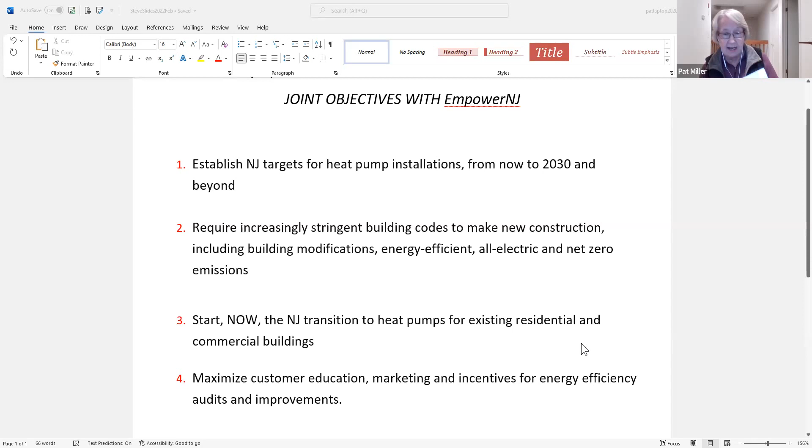Thank you, Pat. So today we have two distinguished speakers. First, we're featuring Hap Haven with the New Jersey Clean Energy Program. Hap has been on our previous webinars and he covers the most bases and is always one of our most informative speakers. So Hap will spend about 30 minutes discussing paths to a zero carbon home and will show us the steps residents can take to achieve net zero. Hap, the meeting is now yours.

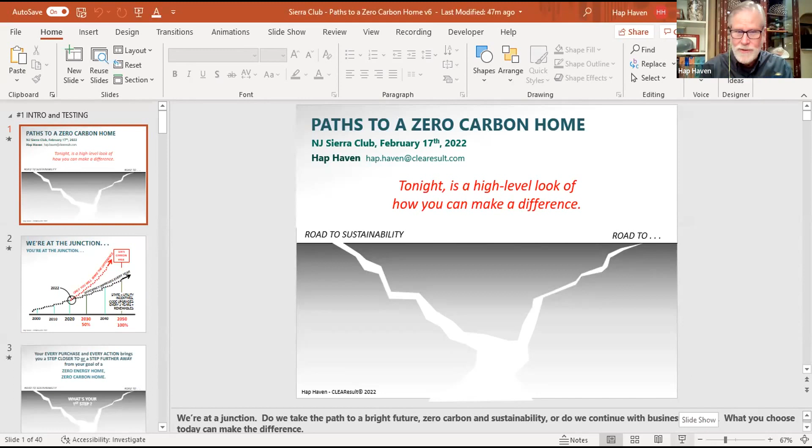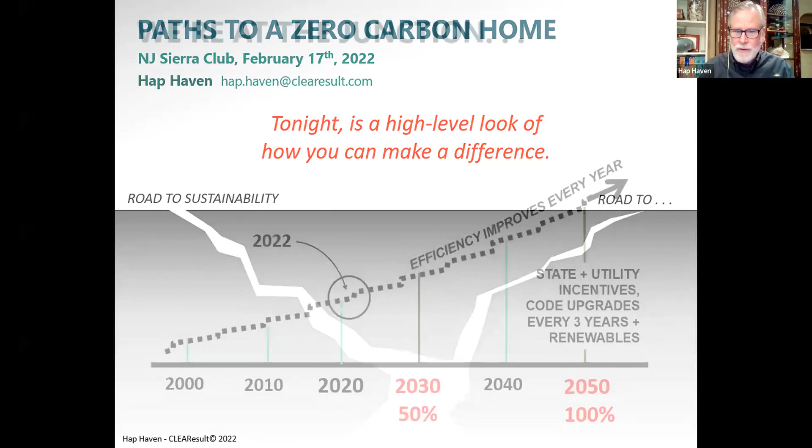All right, so first of all, I just have to say I'm really excited about this presentation because it's the first time that I've put together all the paths to zero energy, zero carbon. And tonight, I just want to say this is a high level presentation. I say that because every slide that I'm going to show you tonight could in fact be a presentation all by itself. You could drill down into the details and spend an hour on every one slide, but it's a presentation about you and how you can make a difference,

because a lot of people think that, well, you know what? We're going to get there. We're going to get to this magical goal in 2050, because every year codes get better. There's incentives on the state side, on the utility side, and even tax credits on the federal side. So people are in this malaise about, yeah, it's going to happen. The problem with that is the goal is way up here. And if we just track where we are right now, we're going to fall grossly short of that.

And so what I say is we're at a junction right now, because only you, meaning all the people on this call and all your friends and people that you know, are going to be able to get us to that goal. And it can't be like, oh, someone else is going to do it. We all have to take personal responsibility and get going on it. So let's start talking about it here.

Just give me a second here. All right. Sorry, I just have a big bar across my presentation. It's hard to see it.

So let me just say that every step you take, every action you take, either brings you closer to what we want, which is that sustainable society, that zero carbon home, the zero energy home, or takes us away from that. So we're at a crossroads, right? We can take one road and go to sustainability, or we can go down business as usual, and it's not going to get us where we want to go. So I ask you, what's your first step? And this is why I'm excited, because in 3 slides, I can tell you what your steps are.

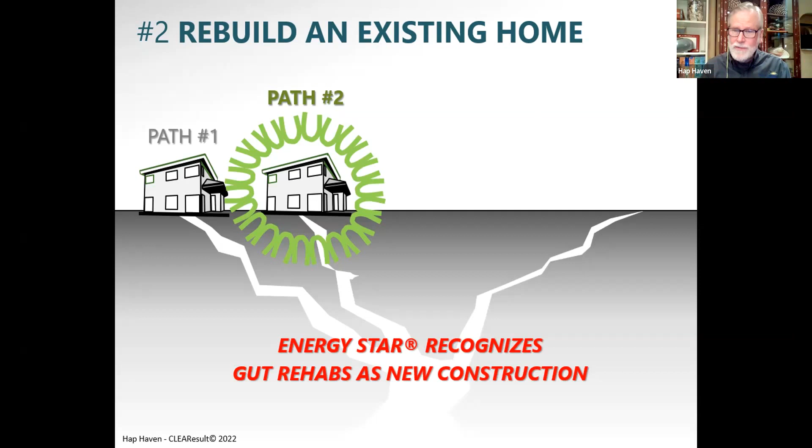So I can buy a brand new house, I can do a gut rehab of an existing house, or I can take the third path, which is the one that most of us are going to take, which is upgrading the home that you're in, and the upgrading starts with the shell itself. The reason it starts with the shell and not the mechanicals is because the mechanicals, meaning your heater and air conditioning, are sized to the heat load of the house, heat gain, heat loss. If you were to put in a brand new system sized for your house now, and then air seal and insulate it, you're going to be way oversized on the heating and cooling plant.

So start with the shell, then the mechanical systems. And of course, appliances can happen anytime. So we've got these three paths: new home, rehab, or upgrade. The beauty of it is the components and the efficiencies are similar no matter what path you choose.

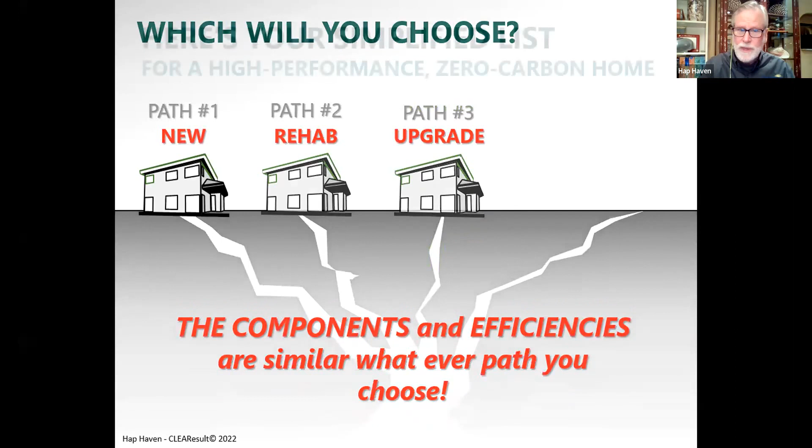All right. So let's talk about it. The first one is, if it's a new house, you should be buying an Energy Star house, zero energy ready, or net zero home. And if you do that, the process to make that house the way it is has integrated design and certification. And we're going to talk about that.

If you're in your existing home, it's going to be an energy audit. Okay, that's the first step that you're going to take, no matter what path you're on. Obviously you're just paying for it if you buy the new house, and you're going to be owning it and working with it if it's in an existing home.

The second step is to embed the solutions directly into the shell of the house. So we're going to bake into the house the things that make houses efficient, and we're going to talk about each one of these as we go along. The third one is to install all the solutions into the shell, meaning the heating, the cooling, everything else, the appliances, as most energy efficient as possible. So 3 things to look at, and let's get right to it.

If we're going to do the certification and or audit, both of those, focus in on and embrace building science. Building science first started coming along strong in the late 70s, early 80s with the Weatherization Assistance Program. And we started codifying and putting the scientific method to, oh, how tight is this? Is that working right? It's come along.

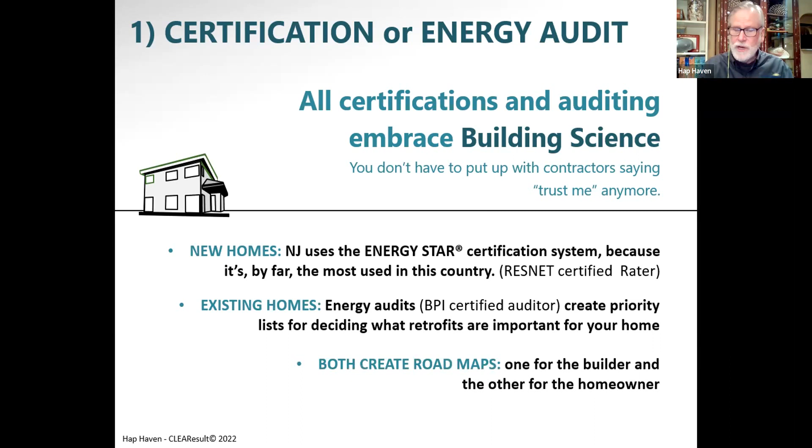So where do we sit for Energy Star homes? A score somewhere around 55 to 65. Zero Energy Ready is somewhere between 45 and 55. And of course, the Holy Grail, what we're looking for, are net zero homes that have a HERS score of 0. And it doesn't mean they're not using any energy. It means that, net, over the course of a year, I use this amount and I generate that amount.

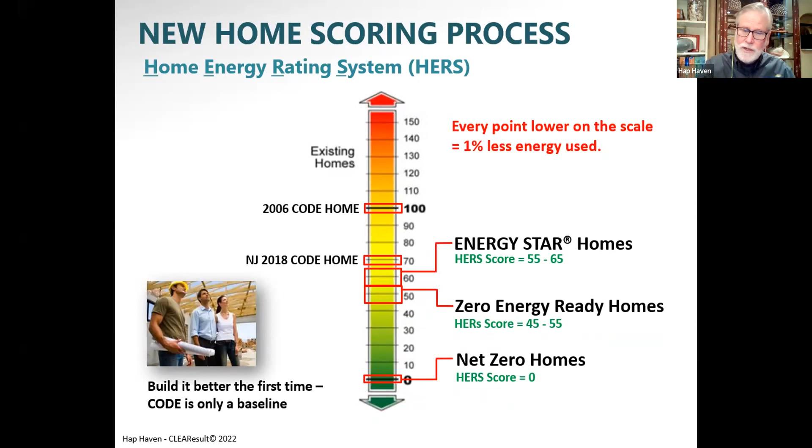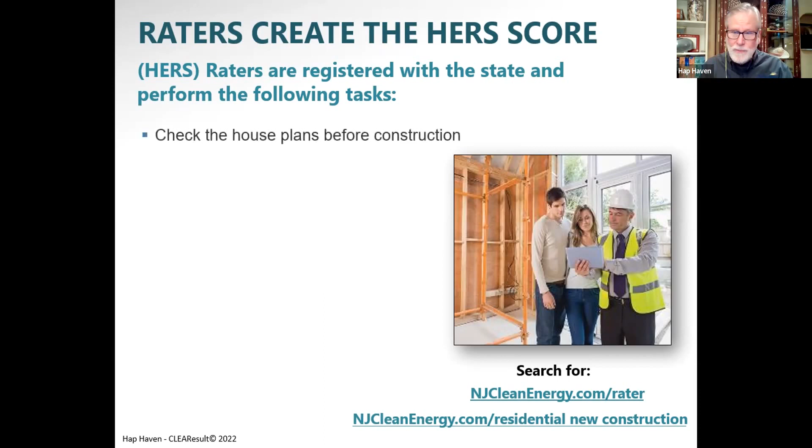So it's the same amount. The raters work for the builder, not for the homeowner, and they help the builder understand how to maximize their construction. They do a pre-drywall check, like the photograph here, looking at the house before it's closed in from the inside and outside, so they look at the shell and the framing.

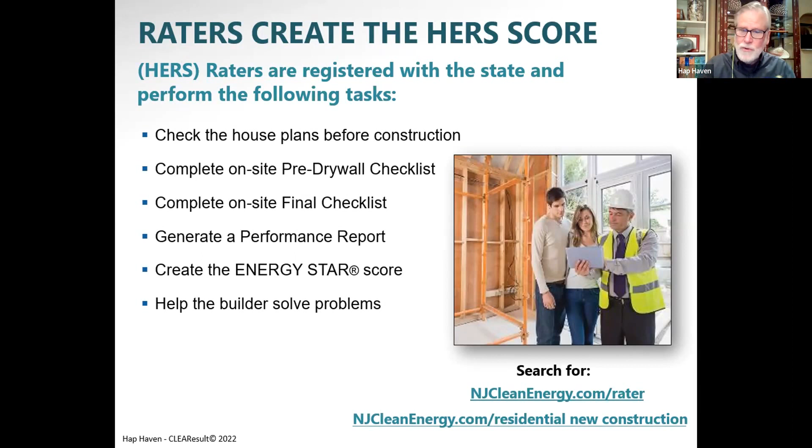Then they do a post inspection and generate the score. Moving from new construction to existing homes, the Building Performance Institute auditor is going to use Home Performance with Energy Star protocols. By doing that, they can tell you exactly what steps to take to re-engineer the home to be more comfortable, energy efficient, safer, healthier, and more durable. These are the things we're looking to do.

Now we're doing that in the new home or the gut rehab too, it's just not involving you in the same way.

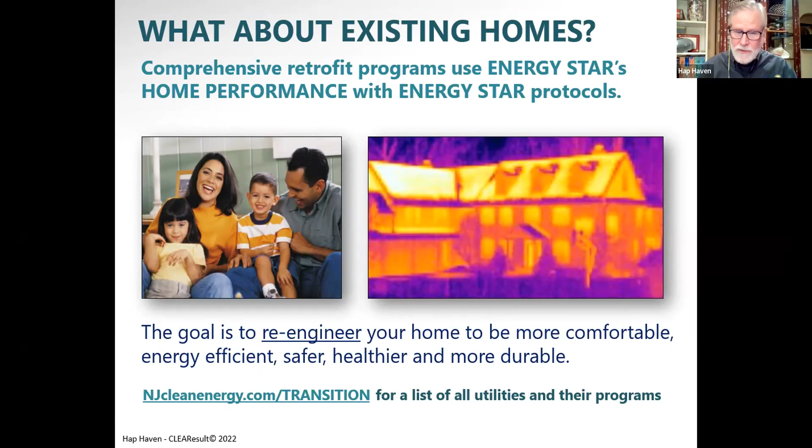Now, as an energy auditor, if you've been around a couple of years and done a couple hundred homes, you can walk into any house with a clipboard and basically inventory it without tools. But you're always going to be using the tools. I'll guarantee that if you're good, you'll get it 90-95% right, but you use the tools to guarantee that what you thought you saw was in fact accurate.

A good example is the blower door. It's the workhorse of energy auditing - it can depressurize or pressurize the house, whichever you need, and find out exactly how leaky the house is and where the leaks are. There are lots of other tools, but every energy auditor should be using a blower door, an infrared camera, a combustion analyzer, and a moisture meter, because these answer the most important questions inside the house.

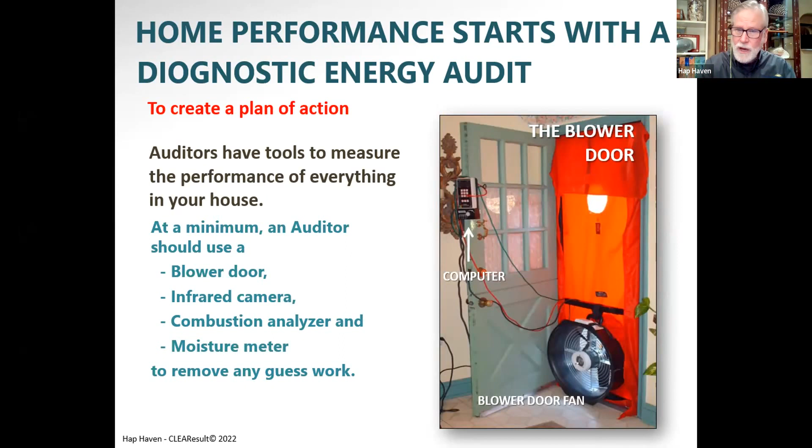Now, this is like a week-long course just to talk about the tools, but let me give you a quick picture of a great tool, an infrared camera, used with another great tool, a moisture meter. I'm looking at this picture of a basement - a digital picture. What I want to know is where is it wet and where isn't it. I know it's wet in the back here where I'm putting my cursor. You can see the parging, the mortar, beginning to fall off there - that's wet. Well, where else is it wet?

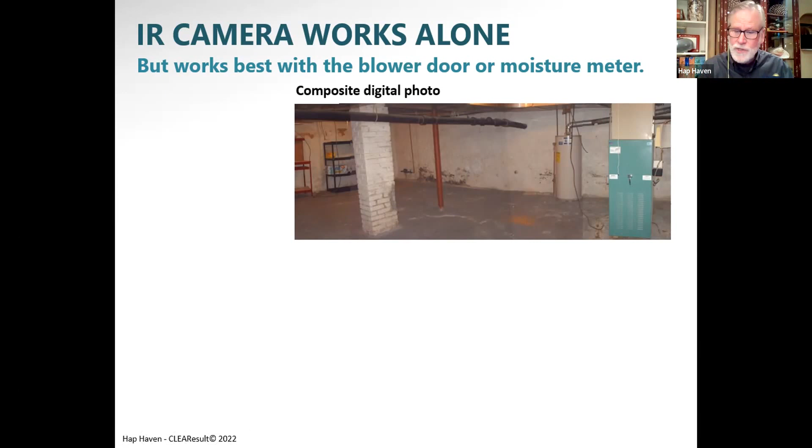Use the infrared camera in combination with a moisture meter, and this is what you see: blue is wet, darker blue is wetter. This tells me one thing about the basement that's really critical in this house - the water problem is coming from the bottom up on the front of the house. It's a subsurface water problem. I'm not going to be able to deal with it unless I dig up the entire front yard.

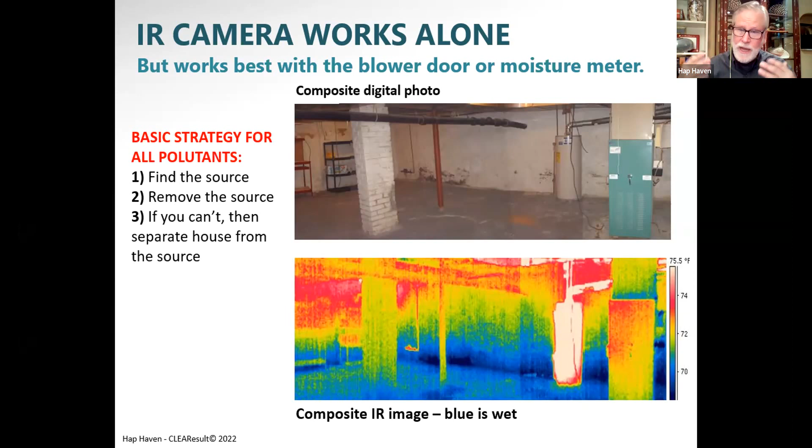So what we say in the business is every pollutant basically has three things - if it's radon, water, lead, whatever it is - I want to find the source, I want to remove the source, and if I can't remove it, I want to separate myself from it. In this particular case, we can do that, but it's going to be an interior treatment as opposed to an exterior treatment. All right, so that was the energy auditing side of it and the certification side of it.

The second thing is doing something where we're baking it right into the building, and those are called control layers. You might ask, what on earth am I trying to control? Well, it's really simple. I'm trying to control heat, air, moisture, and the sun. These are the four things I'm trying to control, and my shell should do it for me.

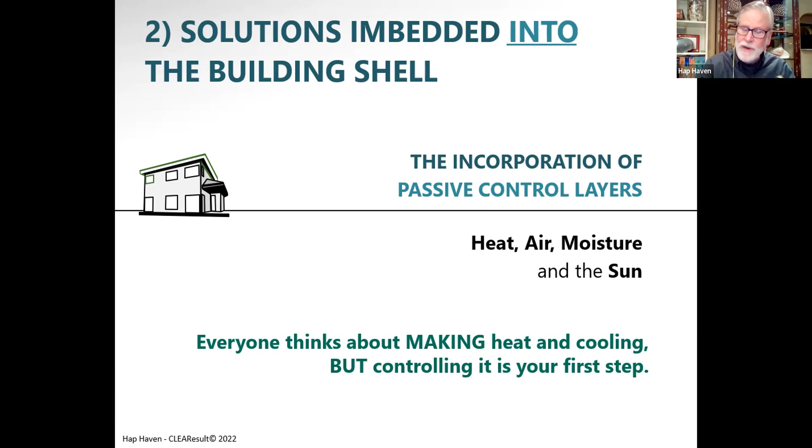Now, everyone thinks about making heat and making cooling for the house, but that's the second step. The first step is to control the envelope. Then you can think about the second. Here's heat gain in the summer, heat loss in the wintertime. This is what we're thinking about, and it's different depending upon the house.

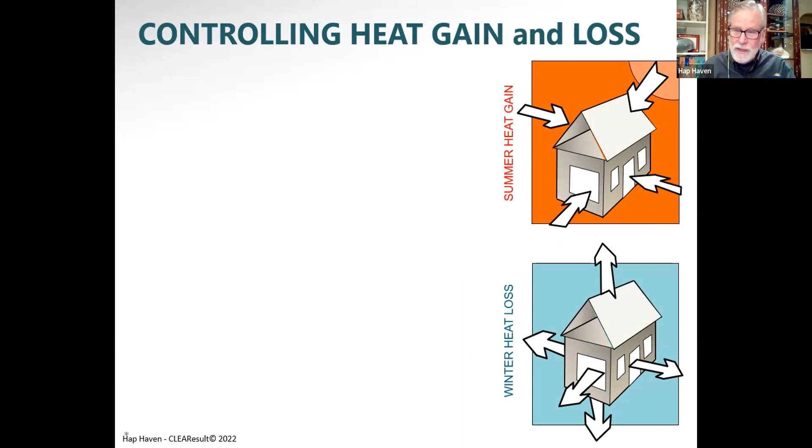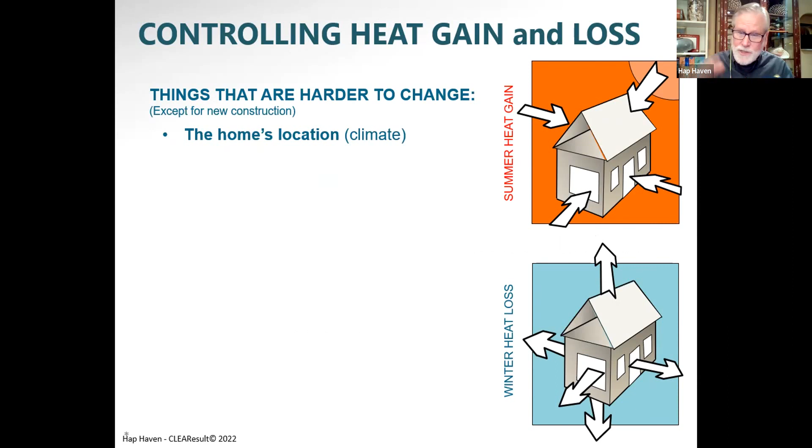So if I have a brand new house, there are things I can change. If I'm building a house from scratch, I can change its location. Is it built in Cape May, or is it built in Sparta? Big difference in terms of climate. Also, when building a house, I can face it the right direction if I want to get the sun to heat the house in wintertime and turn my back on the sun in summertime.

I can also control how I create it—is it a framed house, an insulated concrete form house? What kind of structure is it? I can control all these things, and I also control how big it is. So these are all things, in new construction, I can control.

But there are some things I can still control even after I build the house. I can control how leaky it is—I can air seal it, and I can also insulate it better. Some insulation, like wall insulation, is a lot harder than basement or attic insulation, but I can still do it. And how the windows are shaded—these are all key things.

It's kind of funny—I remember doing an energy audit maybe 15, 20 years ago on a new development. Great, beautiful house, had a great room with two-story windows, and those two-story windows were facing west. So every day about 4 o'clock, the room overheats. That's why we love to use mini splits in the industry, because I can air condition just that room, and I can do it very effectively. But if the builder had thought about that to begin with, he could have baked in some shading on those windows even before we got going.

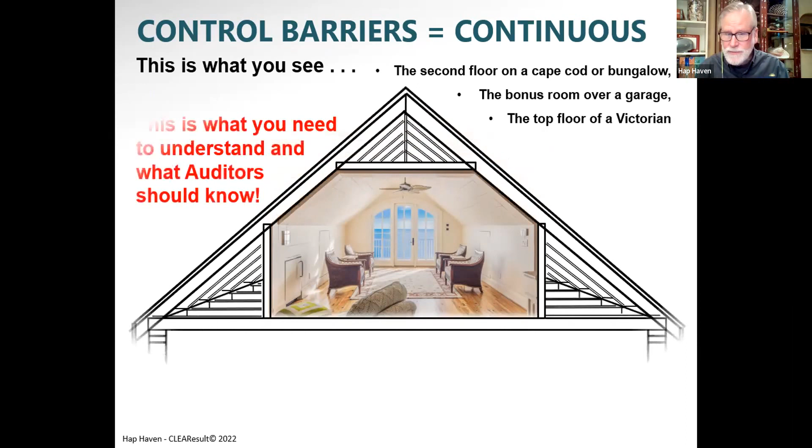Now, remember, we're an energy auditor, and this is a nice room in a house. It could be a second floor on a bungalow, or a bonus room over a garage, but you'll see that it's under the slope of the roof. You look at it like this—the energy auditor has to look at it like this. The energy auditor has to understand the framing of every house, because without that, you won't know how to insulate it or air seal it.

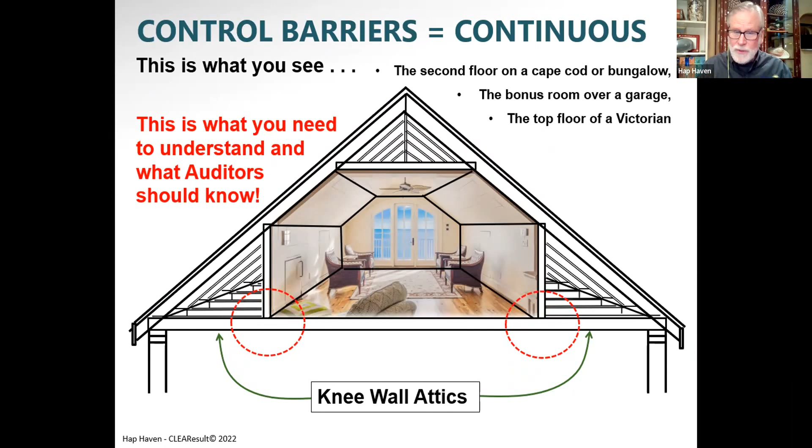You look at this and say, okay, we have two attics behind those walls. And I have a problem right there where I've circled the two joints, the connections between the flooring and the walls. Here's that on the left-hand side—you can see a close-up of that knee wall and how the air travels through it. When we talk about the control layers being continuous, this is what we're talking about. It's not continuous—there's a break in the air barrier here and the insulation barrier.

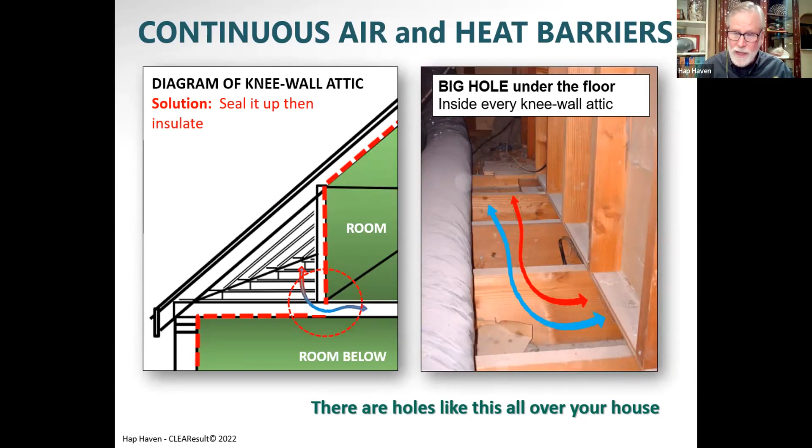So the air from the cold knee wall in the wintertime goes underneath the floor, making the ceiling of the first floor cold, and making the floor of this little upstairs room cold as well. I need to be able to control it—there are holes like this everywhere in the house.

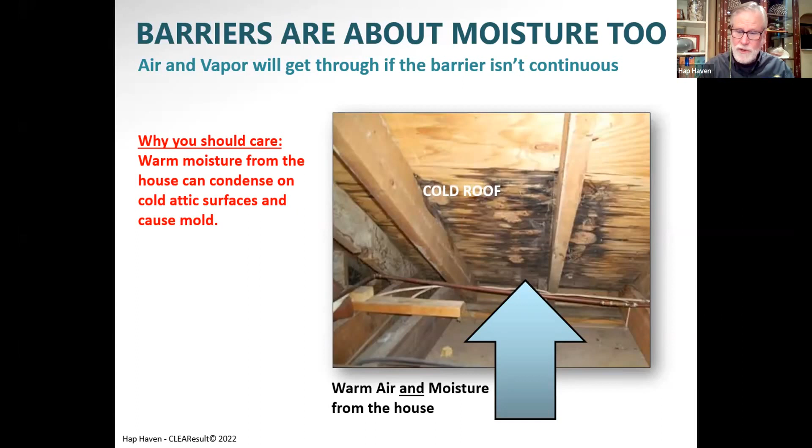The other reason we need to do this is because moisture goes wherever the air goes. Moisture is lighter than air, so it goes up, but wherever the air goes, it takes it with it. If I have holes in the attic floor, the moisture from the house will end up in the attic—no ifs, ands, or buts about it. If there's enough moisture, or if the attic is cold enough, we'll get condensation and mold. It's as simple as that. That's another reason why we have to control—remember, I said air, heat, and moisture. These are the three things we need to control, and sun, we need to control as well.

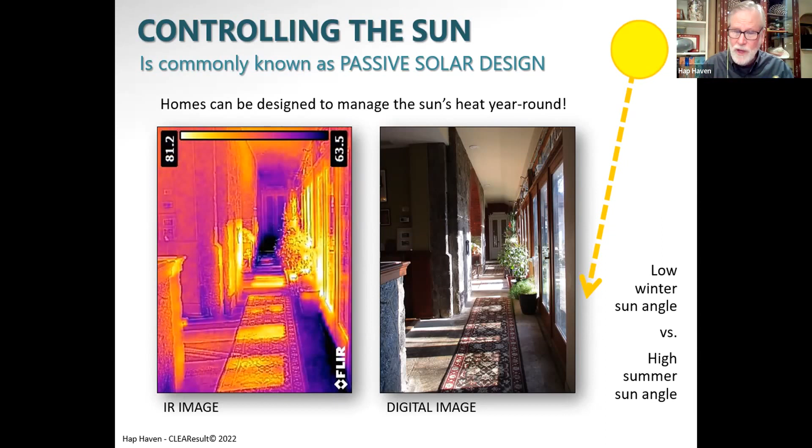All right, here's the last section, and in a lot of ways the most important, because we're talking about electrification. Mechanicals—this is what we put onto the house. We're not building it into the house, we're putting it onto the house.

Heat pumps that replace air conditioners, and heat pump water heaters. We also have high efficiency appliances: LED lighting, induction cooktops, heat pump dryers. I'd submit that very shortly your car or truck will be considered a high efficiency appliance for your house, because you're going to be charging it from the house. And in case of a power outage, the car or truck will be able to power your house—a symbiotic relationship.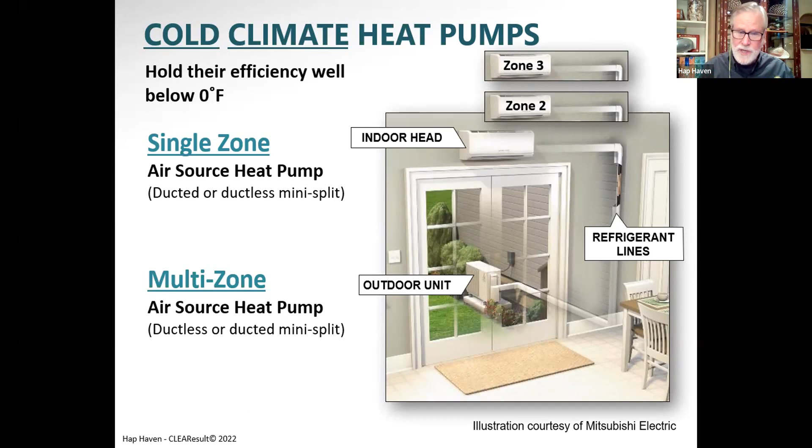Let's talk about how the heat's distributed. I just showed you the typical wall mount—most people are familiar with seeing that mounted. They're rather large, but they're going to get smaller and smaller. But that's not it—you can bury something in the ceiling and do a ducted version, and put cassettes in the ceiling that go 4 different directions or 1 direction.

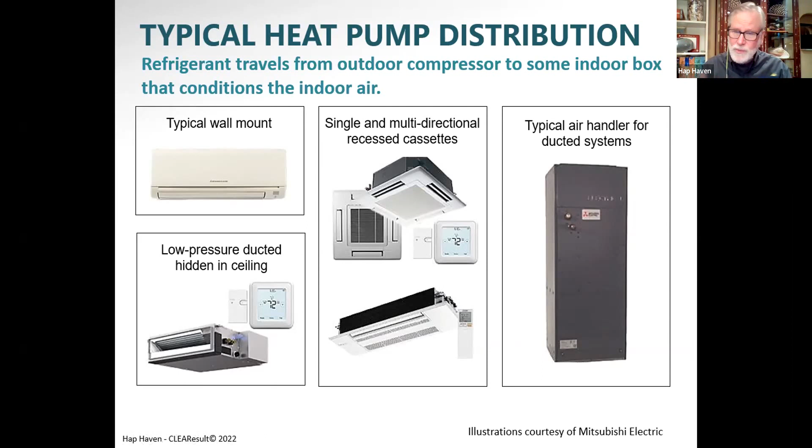It's very flexible—or you can hook it up to an air handler, which would replace your existing air handler in the basement if you have a ducted system. So heat pumps are very flexible in terms of how to heat and cool your house.

But that's where I have to stop and remember what we're talking about here: refrigerants. What we're doing is using a refrigerant, like in your refrigerator, freezer, or air conditioner, to move heat from one place to another. That's why it's called a heat pump—we're pumping from one place to another.

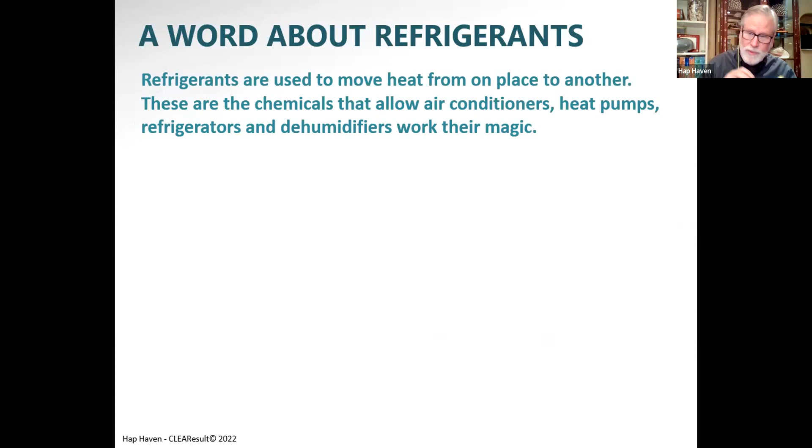But it's something we need to keep in mind. When we talk about global climate change, the warming of the atmosphere and all that, we're talking a lot about CO2, carbon dioxide. The entire global warming potential scale is based upon CO2—it has a GWP of 1.

Natural gas, which is what we're trying to replace, or methane, has a global warming potential of 28 to 36. Refrigerants, their global warming potential is in the thousands. So we don't want to be leaking refrigerant out into the atmosphere because it has terrible consequences, okay?

The EPA and most countries are working toward establishing the law that refrigerants moving forward have a global warming potential of 750 or lower. There's a whole bunch of them out there on the market, but most aren't used for various reasons. At the very bottom of the page here, R32 is probably the most commonly used, not much in this country, but all over the rest of the world, because it has a GWP of 677. So that's taking us where we want to go.

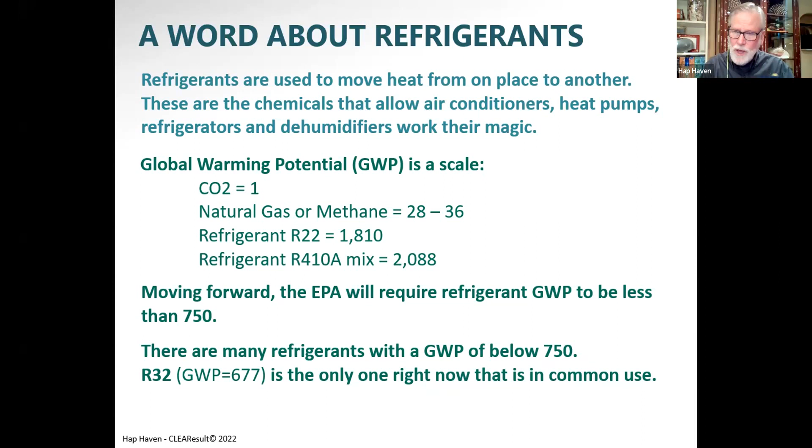But there's another step we need to take in the marketplace, and that's this slide. Instead of doing a traditional heat pump where we have a compressor outside and some sort of distribution inside with refrigerant lines that can potentially leak down the road, you have a single unit. It's called a monoblock, and it's a single unit outside that has the compressor and the evaporator, with only an extremely small amount of refrigerant, because it's only going from here to there and back again. It's not being carried into the house, and it's factory sealed, so it can't be screwed up in the field. I'm going to submit to you that as we move forward, you should be looking for this, okay?

They have, on the left, low temperature solutions, high temperature solutions, and hybrid solutions, so they've got something for everyone. The problem is that we don't have a lot of these in the marketplace here in this country, and I've been saying this all along: our country is so far behind the curve compared to the rest of the world that we have to hurry up and get with it.

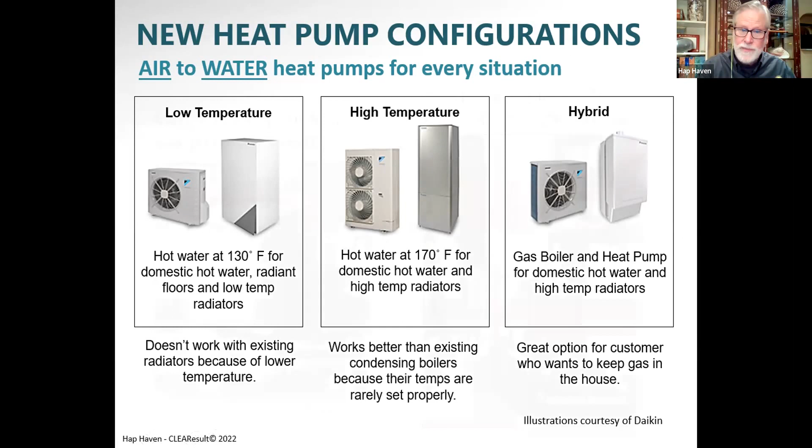All right, I'm coming down the home stretch here. Let me just look at a retrofit. Here's a customer that has a 96% gas furnace. They want gas in the house, you're not going to take the gas line out of this house. Well, that's fine, no problem. You replace the air conditioner and you put in a heat pump.

Now what I can do is air condition like normal, but I can also heat on the shoulder months, into the fall and into the spring. The changeover time from when I'm using the heat pump to when I'm using the high efficiency gas heater depends solely on the cost of gas and the cost of electricity. It's a very simple formula to get the changeover point. In New Jersey, the changeover now is somewhere around the high 30s, low 40s. But if you have higher gas prices, the switchover point gets lower and lower, below freezing even, or right at freezing.

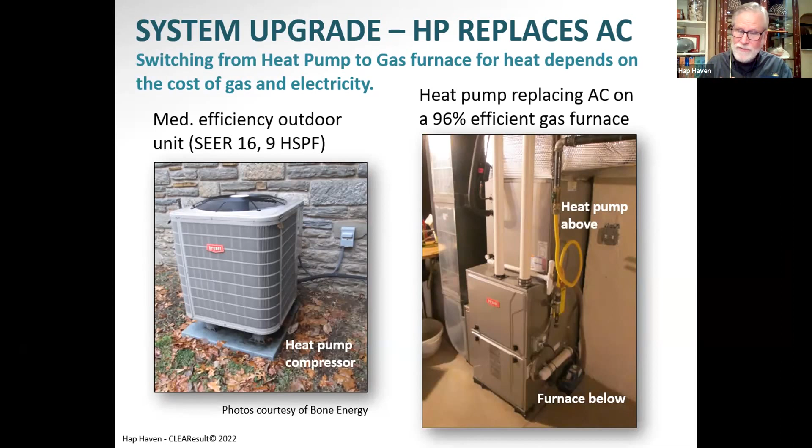So this is another way we're going to go. And finally, in this section, the heat pump water heater extracts heat from wherever it's located, like the basement, and pushes the cooler air outside normally. But you can put a duct on it with a damper, and in the summertime you can bring that cooler, drier air into the basement to help cool your house and dry the basement all at one time.

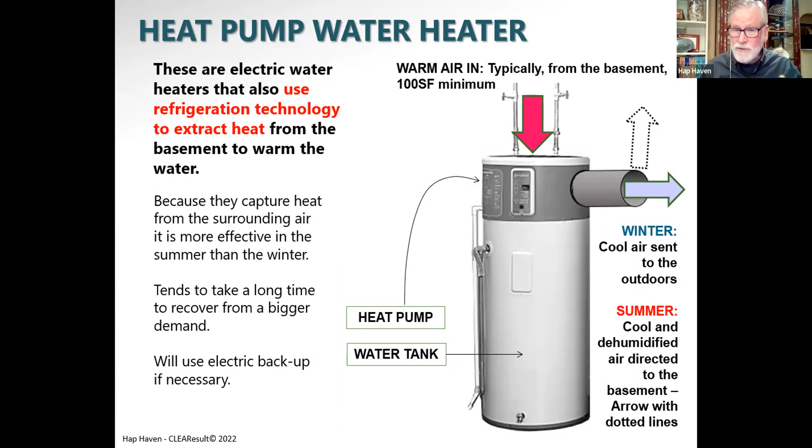So let's take a quick look at why heat pump water heaters are so good. They're super efficient, 3 times more than an electric water heater and 3 to 5 times better than natural gas. Now cost is another story, but efficiency-wise, these are the numbers. And then, are they safe?

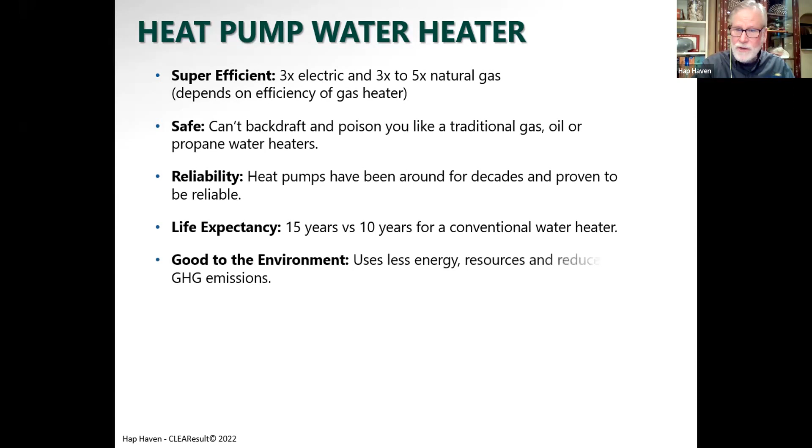Absolutely. No backdrafting possible with these units. You're never going to get CO in the house. They're extremely reliable, they've been around for decades now. They last longer than typical water heaters, and they're good for the environment. They're a good investment too.

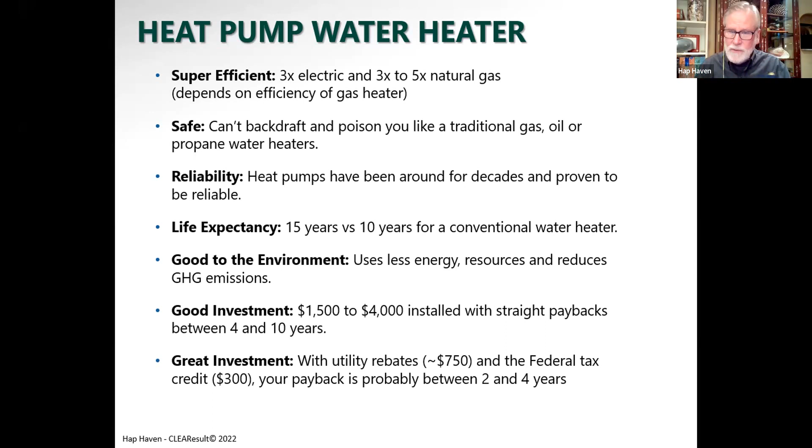Typically, let's take the high end: payback in 10 years. That's a good payback, okay? But it's a great payback if you use all of the different rebates that are available for them right now. So this is like a win-win situation. I can't recommend it more. I can tell you right now, I have a solar water heater on my house, I've had it for years. If I was to do it again with the technology now, I would install a heat pump water heater instead.

So when it comes to all the other appliances in the house, the answer is just, as you need to replace them, take the next one up, buy a more energy efficient one.

Consider heat pump technology - it's the game changer for us. Most efficient dryer, most efficient water heater, most efficient heaters and air conditioners. It's fantastic.

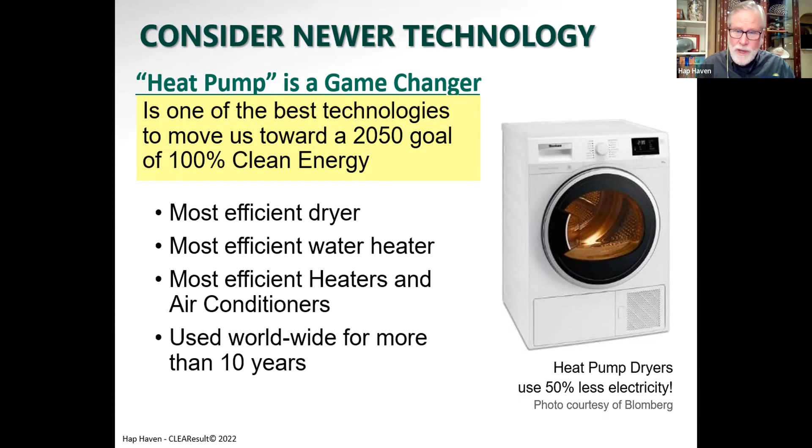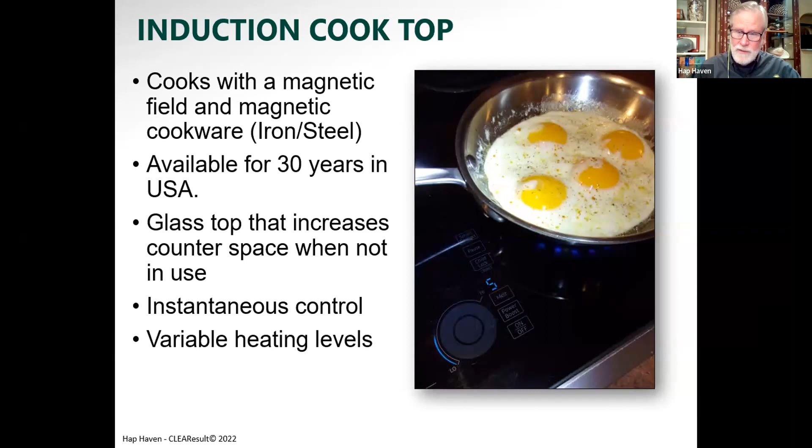You can roll out your pizza bread on this if you want. And it looks like this up close - there's the control on the left, and I can control from 0 all the way up to 8 on this scale. I can do a power boost, which will boil water in under a minute, and I can also put it on simmer or melt. So I have instantaneous and variable heating levels. Highly recommend it to everyone.

LED lights - I don't know if we even need to talk about these right now. They're sort of like the de facto light bulb. I remember the hysteria around these; we have hysteria around everything in this country when it's first introduced. I think everyone recognizes they do a great job. You can get a lot of different color renditions, and they're making light fixtures that are radically different than what you could have with an incandescent or even a compact fluorescent bulb.

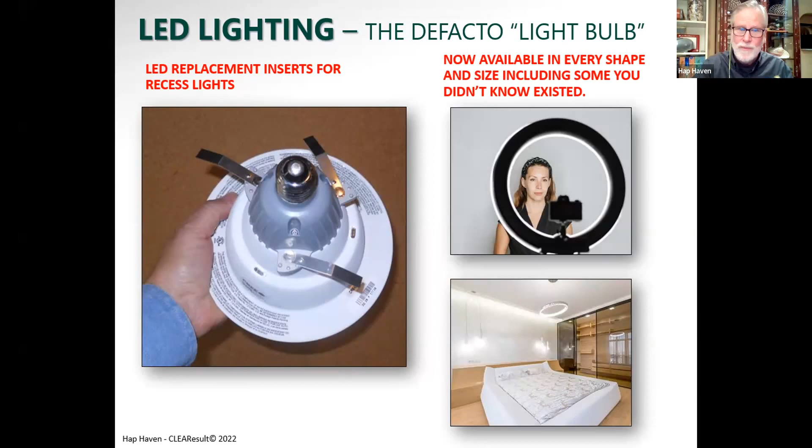And this is the last thing I was talking about, the car. People talk to me all the time about range anxiety - that's when you buy a car but drive more than the range the car has. Buy the car that suits your needs, or buy one that suits a limited amount of need, and then rent a car or take an Uber if you got to do something else. So that's the key here.

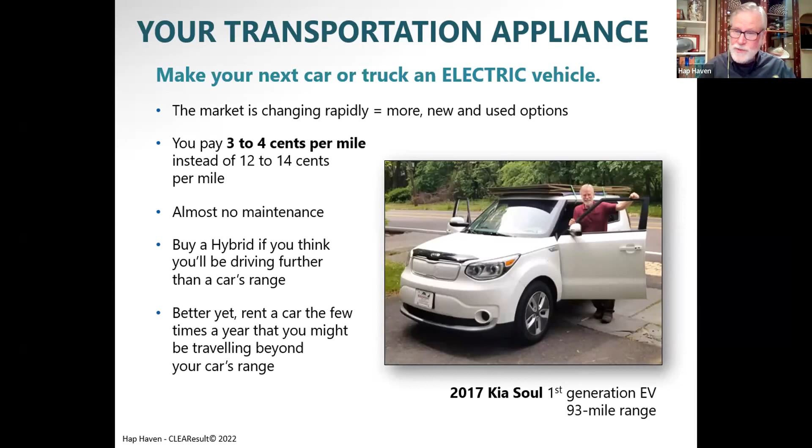This is the first generation, meaning it's less than 100 miles. Now you're getting routinely 250, 300 miles on cars. But I don't care, I never have range anxiety - where do I go? I go to Home Depot, I go to the coffee house, downtown, whatever. I'm not driving to Pittsburgh with this. So just buy what you need to buy.

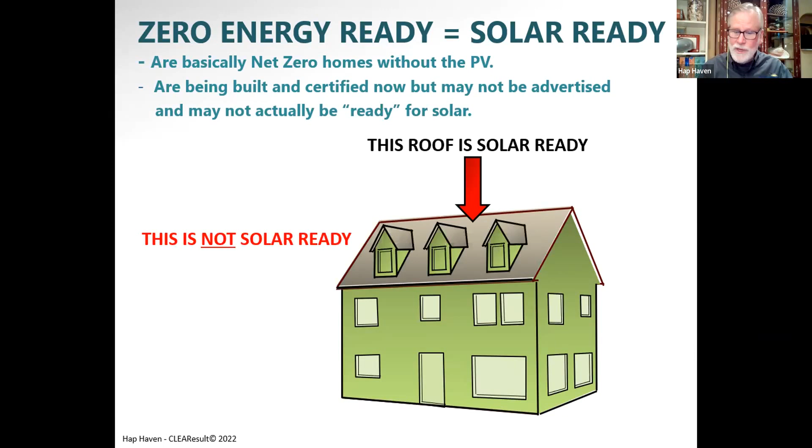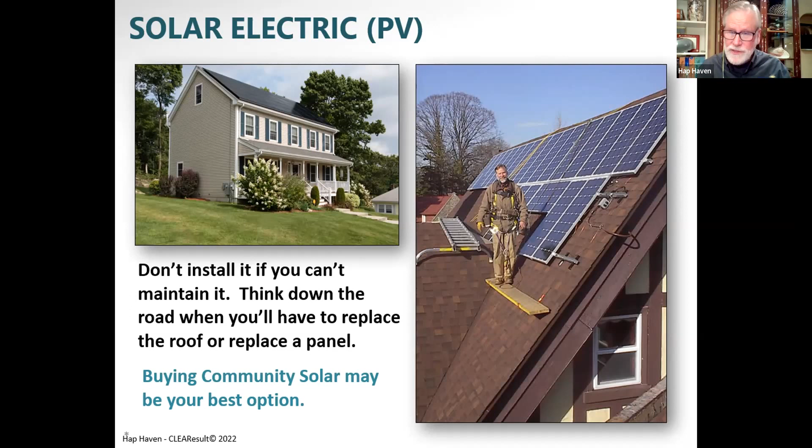And the one on the right is beyond the pale - this is a 3-story house, so we're talking more than 40 feet in the air on a 12-12 pitched roof. If that roof has to be replaced or any servicing happens on the system, it's going to be a nightmare in terms of cost. It doesn't mean you can't get to it, it's just you need a lift - a huge boom thing to be able to get to it.

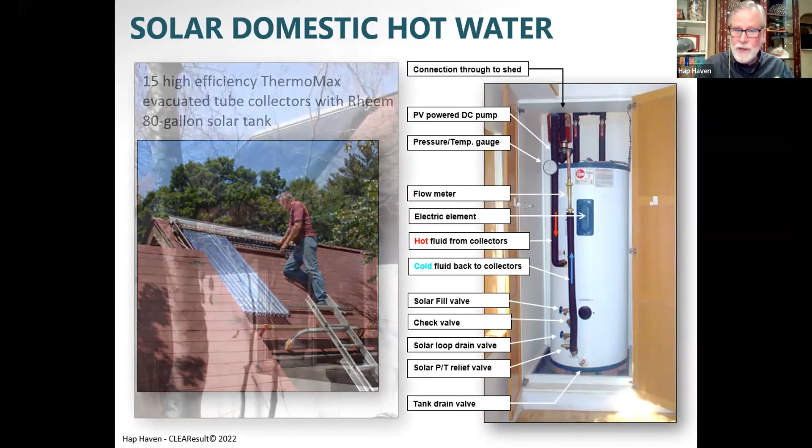Solar water should be like this - this is mine, evacuated tubes. They're one story off the ground, easy to get to, easy to connect to the tank, which is only about 12 feet away. So solar hot water works phenomenally well. There's the panel from another direction.

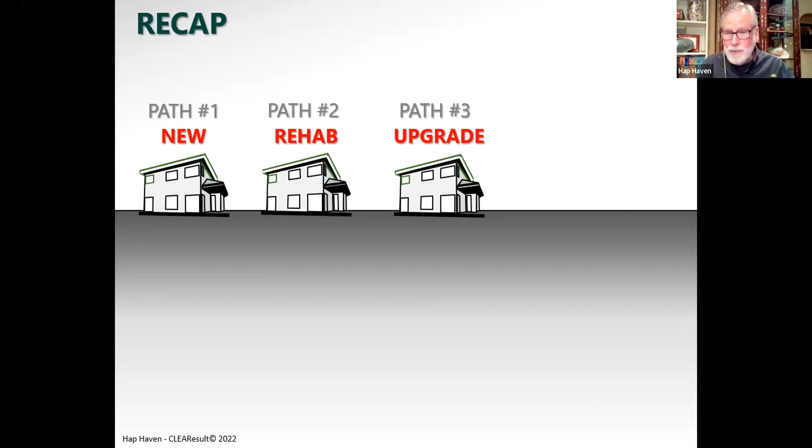All right, so just to recap here, there's 3 paths to take, and I hope you're going to make a decision tonight as to which path you are going to choose. New, rehab, or upgrade. If you're doing the new, I highly recommend you get out there right now, even if you're not going to buy the house for another 3 years, because to move the market, we need people like you calling up the builder saying, are you building zero energy homes? And I can tell you right now, they're going to say no. And you're going to say, well, why not? Be the market, push the market forward.

Choose your path and get started. Create a high performance home, whether it's a new home or whether it's the rehab. Learn the science behind it, because you don't want contractors to be able to pull the wool over your eyes, and test, because you can verify. As one of my colleagues says, proof is possible. You can tell exactly how everything in the house is working.